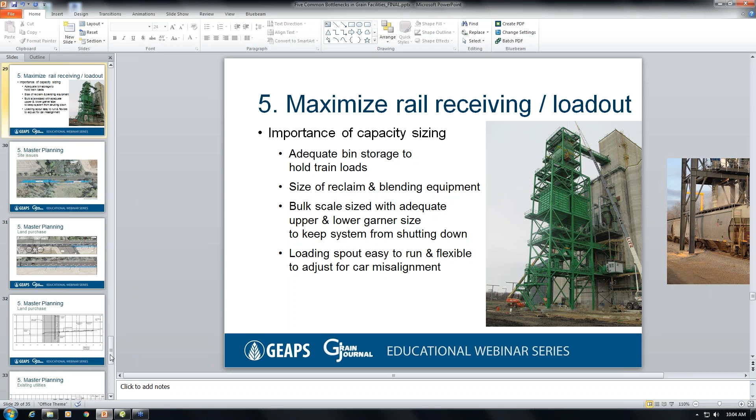Thank you. So in our presentation today, we're going to talk about a number of things. The first one is ways to help keep traffic flowing through your site and minimize backups, ways to get trucks unloaded faster at your facility, talk about how automation can help run the facility with less labor, limit product damage and labor in filling and reclaiming outside storage, and what are some options to make loading trains easier and faster. Pat is going to now talk about alleviating site traffic issues.

All right, thanks, Doug. There's going to be three main subjects that we're going to go over today: staging, routing, and then scale and probe locations. The first one we're going to discuss is the staging area. So staging area being defined as the area between the entrance to the facility and all the way up to the probe location. Typically what we see for these facilities is you get your peak harvest time. You're getting anywhere from 250 to 500 trucks per day, and it requires a lot of stacking space on site.

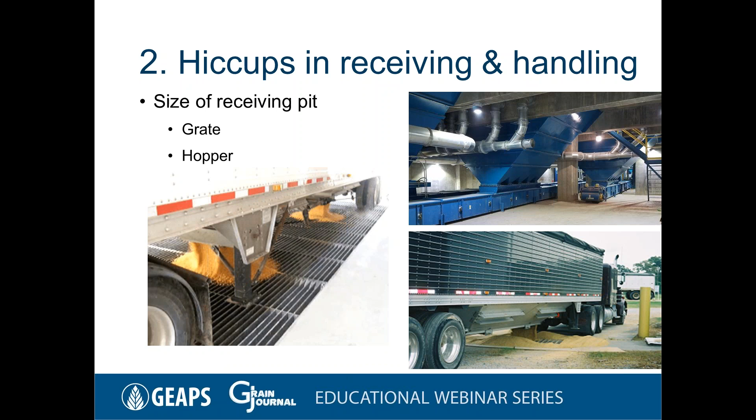Now, when you're looking at exactly how big the grate and the hopper needs to be, it's going to vary somewhat on a case-by-case basis, and it's also going to have to be sized in coordination with the reclaim equipment. However, a good rule of thumb is for the hopper to be able to take one truck of material. So you've got your hopper and your grate there.

The next thing is have an employee there to open the truck hatches at the bottom, right? So a trucker pulls in, has to get out of his cab, walk down, open up the hoppers, stands there. When it's done, close the hoppers, and get in his truck. Well, that time for the trucker getting out and back in is additional time that you're using up in the cycle.

Another issue that we sometimes see is truckers don't always want to open their gates all the way. Sometimes they open them just partially because they're afraid of having the grain back up and flow over the sides of the grate, which gets back to sizing the grate properly. So it eliminates some issues like that. And also, truckers do tend to talk with other truckers and employees. Keeping them in their trucks helps limit that as well, keeps distractions from happening.

So now you've got the actual pit there, sizing the receiving equipment. Now, when you're sizing the equipment, looking at how fast it's unloading, that is one thing that you want to analyze for cost of what you're willing to pay for and things of that nature. The bigger issue to address, though, is bottlenecks. And when I say that, I mean if you have a 25,000 bushel per hour receiving conveyor and a 20,000 bushel an hour leg, you've got a bottleneck there.

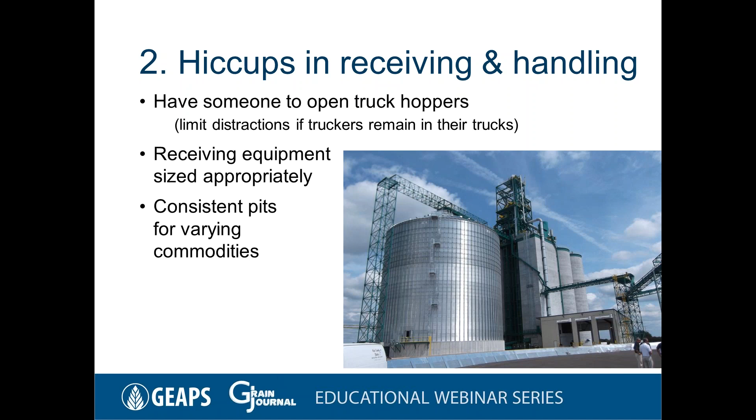So the next item we're going to talk about is automation, specifically finding the balance between labor and automation. Labor is hard to come by, and when you do find it, it's hard to retain it. This is the case with not just the grain industry, but most industries in the country right now. So how can automation help you?

Well, automation can basically do the work that you may have employees do, and you can do this at various levels. So we're going to start out with a partially automated system. This will generally involve installing a PLC or a computer to run your facility. You'll have a central computer in an office. Sometimes you'll have various terminals located around the facility where you can start and stop equipment and run it.

This PLC is typically hooked up to safety devices so that if there's an error, it'll shut down all the appropriate equipment. Not just the machine that had damage or had an error, but any other equipment going to it or from it, to help prevent that from getting damaged as well.

Another thing is a bin inventory system. So not just necessarily high-level indicators, but continuous level indicators. It can help tell you if a bin is full or if a bin is almost full, like there's not really enough room to put a whole truck in there, but it's not quite full. The beauty of these systems is it can really help you out in the paperwork

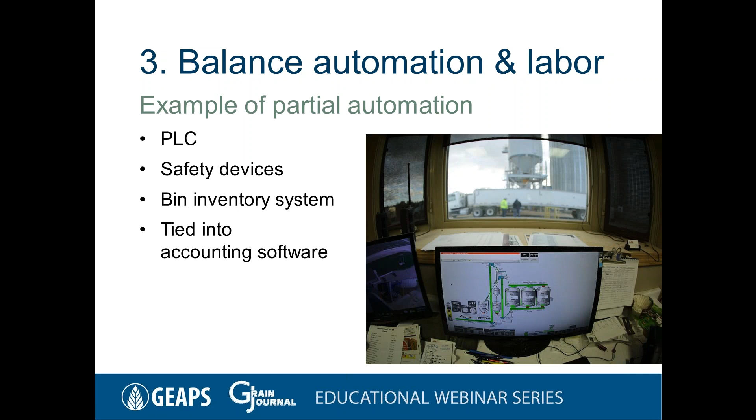of tying it into your accounting software. So if you've got records in there of this truck brought in, this quality of material that you're entering in, it weighed this much, and dumping it, it'll help you keep track of what you're paying your truckers. It'll also help you keep track of your inventory. So when you have enough to ship, if somebody calls up and wants to know, hey, I'm looking for 20,000 bushels of corn, do you have that? It can make a lot of that stuff real easy to access.

So now, this is kind of a simple version of how a PLC system would typically work. So let's say we've got a receiving pit with a truck and we want to send it to the bin on the end there. So what you'll do is you'll click on those two items, truck to bin, and the system will go through and start up the equipment in the appropriate order. So the first thing it'll do is check to make sure the fans aren't running, so when you are dump filling the bin, it's not throwing dust everywhere.

And then it'll start up the equipment, generally from the destination to the origin. Getting all the positions set, starting it up, checking the right gates, starting up the dust containment system associated with that equipment. And once everything is up and running, it'll start up the last piece of equipment, which is the pit, and start getting the material moving forward.

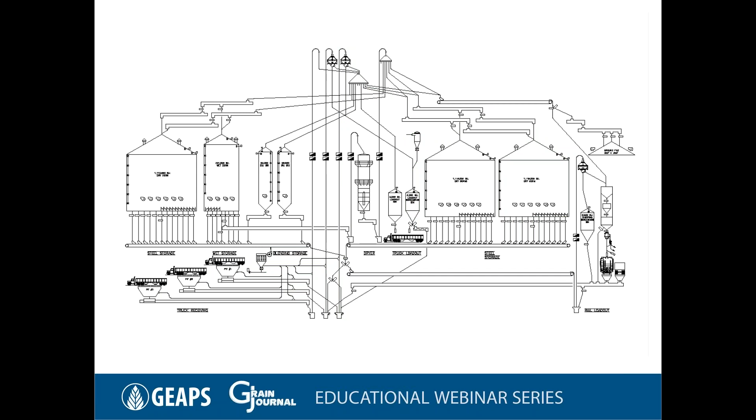This also works in reverse. When the system's done, if you say, all right, the truck's unloaded and hit it, you can have a delay built in there to make sure that the equipment is cleaned out before it shuts down. So it'll shut down the drag once it assumes that's empty, and then following that delay, the associated dust collection equipment, and then the distribution equipment up top until you've got your material in the bin.

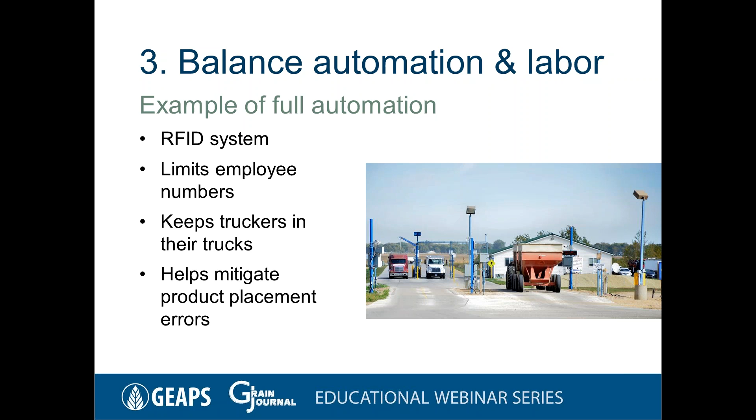So now going a step up from that is a more fully automated system. This typically involves using an RFID system on your facility. An RFID system is where you have a tag in the truck that various sensors read, so wherever the truck is on the site where they have readers, it knows where that truck is. This helps check trucks in and limits the number of employees needed to talk with truck drivers, direct truck drivers, and things like that. Keeps the truckers in their truck, like we talked about before. And as I'll show you in a little bit, it helps mitigate putting the wrong product in the wrong bin.

So we go back to our site here. Trucker comes into the site and pulls up to the probe. There's an RFID reader at the probe. The probe will go and probe the truck. Now, there are actual automated probes starting to be out there that don't require somebody to run them, but most facilities nowadays are still going to be using a probe that somebody's controlling.

But what it does is the RFID reader says, all right, this truck is currently being probed. When the sample comes in, it tags the sample. If you've got automated sampling equipment, it automatically logs the results of that to this truck. Otherwise, whoever's sampling it can plug that information into the computer right there.

So all that information is logged into the computer with the truck. The truck will go ahead, get on the inbound scale. It'll weigh it. That'll get entered into the computer system with the truck. Now, sometimes there'll be a display board here, or if you need to have a little more time for the sampling and grading between the probe and the inbound scale, and before it's ready to move on, you can have another staging area here with another

RFID reader and display. And what this will do is once everything's been graded, it'll tell the trucker which pit to go to. So the trucker will then move forward to whichever pit they've been assigned. And there'll be an RFID reader at the pit. What this does is it tells the system, hey, the truck's at the right pit, or more importantly, it'll tell them, hey, the truck's at the wrong pit, so that you can have several actions, like maybe the equipment will stop, or you'll have some alarms and sirens go off, or notifications go off, hey, you're at the wrong pit. So that'll help you keep from accidentally putting corn in your soybean bin or something like that.

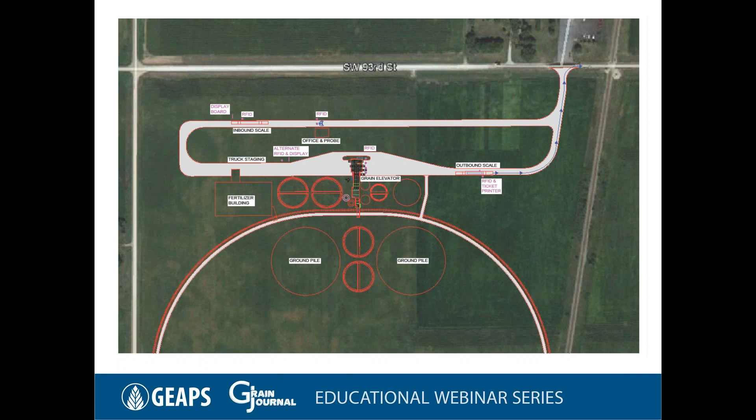So now once the truck's done here, it moves to the outbound scale. We have another RFID reader. It takes the weight of the empty truck. It looks at what the inbound weight is, the grade of the grain that was brought in, how much you guys are paying for that, and it'll print them a receipt with all that information on it right at the printer there. They can grab that, and then they can leave the site. So this really limits how many people you need in order to get the trucks through the facility.

So now moving on, we got our fourth item here, which is effective use of outside storage. When we're talking outside storage, we're talking specifically about ground piles versus bunkers versus buildings. All of these items serve a great bottleneck in harvest time, meaning, hey, you need a quick place to put a whole bunch of grain. You don't necessarily need to store it for long periods of time, but you just need to put a bunch of grain somewhere quick and inexpensively. And all of these work good for that purpose.

Ground piles are labor intensive, and they produce high risk of damaged product. They're typically just kind of dumping it on the ground somewhere at your facility. Sometimes you'll have a prepared pad. Sometimes you just have an open space where you're like, hey, I can put some grain there. You're typically filling it with some portable conveying system that you have to have people moving around, not to mention that system is generally not as fast as your main receiving system at the facility, which is going to slow things down, take more time.

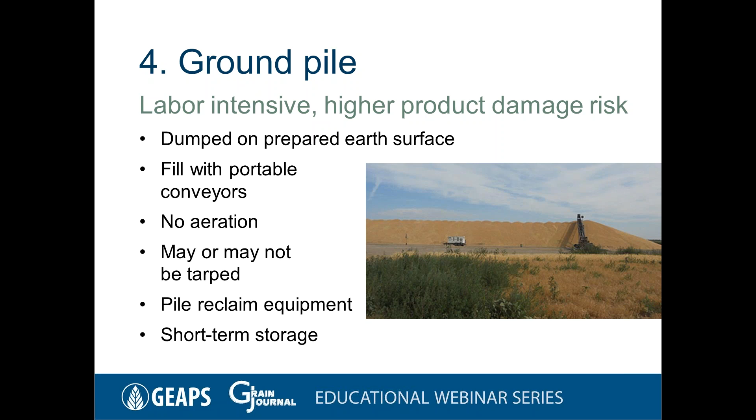You're generally not going to have aeration in this. It may or may not be tarped. If you are tarping it, you have all that time that you need to take and tarp the pile. And then when you're reclaiming it, you'll generally have either a front-end loader or some sort of pile reclaim equipment that's putting the material in a truck and taking that back to the main receiving pit. So even though it's a great inexpensive way to get a bunch of grain down, it's pretty labor intensive to do so.

A step up from this, which cuts down on the amount of labor you'll have, is a bunker system. This is still time consuming to tarp and reclaim, but it's a lot less labor intensive because it's generally tied to the main receiving system at the facility. So the trucks are just going along the regular path at the main receiving pits. Your employees are just out at the main receiving pits doing their stuff. You don't have to have anybody special out there moving the equipment or having a slower system or anything like that.

These are generally on hard surfaces like asphalt, which helps when reclaiming it, as you're going to get less product damage, because when you're getting it back, you're not going to be leaving an extra layer on the bottom, or scooping up gravel trying to skim that bottom layer of the pile off. These a lot of times will have aeration with a center aeration pile or aeration tubes put in. However, if you have the aeration tubes put in the floor, there's labor involved with setting those up.

However, that's generally before harvest starts, so it helps you out a little bit during the rush. And then tarping systems. There's automated tarping systems, which the tarp will raise and cover the pile as it goes, but you still have to get it set up and hook it up around the pile. Otherwise, if you aren't using an automated one, you still have to go and tarp the pile. And as with reclaim, you start to see automated reclaim systems with conveyor systems extending into the pile. And we'll talk about those a little more in a minute here.

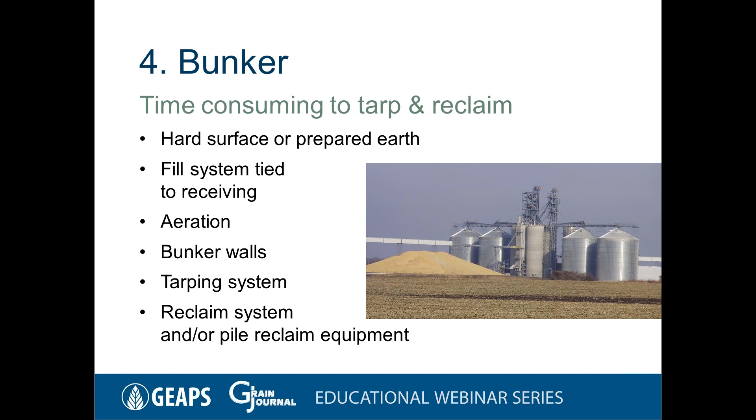Flat storage building. So flat storage building still has the time to reclaim, but you lose the tarping and a lot of those issues associated with it. And it also cuts down on the product degradation when reclaiming it. Typically, these will have concrete floors. They'll be tied into the main facility receiving system. A lot of times, these will have aeration systems already cast into the floor, so you don't have to worry about setting up the tubes or anything like that.

And then with the concrete sidewalls and the roof structure, you've got an enclosed shell that is going to keep the product protected from the elements, and there's not the labor of having to put the tarp on and off and stuff like that. And lastly, with these buildings, you generally see reclaim systems via tunnels in the bottom of these, which will help reclaim a portion of the building before you have to go in there with a front end loader to move the stuff around.

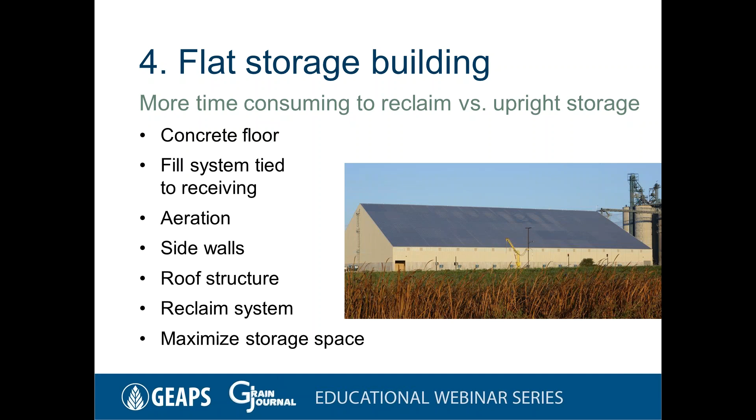So now with all these systems, reclaiming it is generally the most time-consuming, labor-intensive part of the item. So if you put in a reclaim system, being a conveyor that runs underneath the pile, it can help you eliminate having to have trucks driving between the storage area and the main receiving system. Now, this can be done to various extents, whether it be just having a single grate just inside the wall that you can move all the material to, or if you have the conveyor extend to the center tower,

like the picture on the right there, or even extending it all the way through, which is going to allow you to gravity reclaim as much product as possible before you have to go in there and start moving the product around. Now, this can be done with either just a shallow trench that you embed the conveyor in, kind of like the one on the right and the left there, or it can be done with a full-size tunnel in case the conveyor breaks and you are worried about getting down there to fix it or something like that.

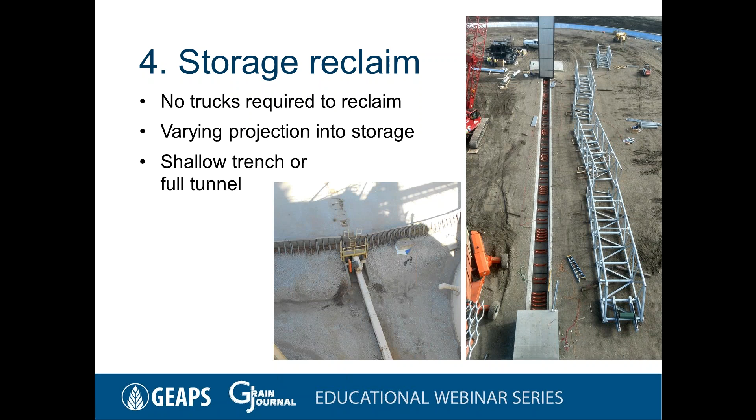Now, if you are reclaiming with a truck and you don't have the automated system in there, there's a few things you can do to help you out as well. So we've got the site here with the ground piles inside the loop track. If you're reclaiming this, you've got a pile reclaimer or a front end loader that you're using to fill trucks. The trucks are looping around, going over to the main receiving pit, dumping the material, coming back, getting filled up, and continuing so.

Now, another thing you can do is put a pit on the back side, basically where your rail reclaim is, or on the inside of the shuttle. This will cut down on the distance that the trucks need to drive and the navigating to get to the pit, and just makes it a little easier. The downside of this is you're not necessarily going to put as big of a pit back here as you do at your receiving building. You can, but it'll probably be a little bit slower because you only got the one pit.

However, if you happen to have a shuttle train there that you're loading, or parked on your tracks waiting for the BN or whoever to come and pick it up, it allows you to keep reclaiming that ground pile while you're loading the train or while the train is blocking access to your facility, which means it's not shutting down a process that you could be doing. And in fact, there's a number of facilities that when they're loading trains, they'll be reclaiming the ground pile and sending it straight to the train.

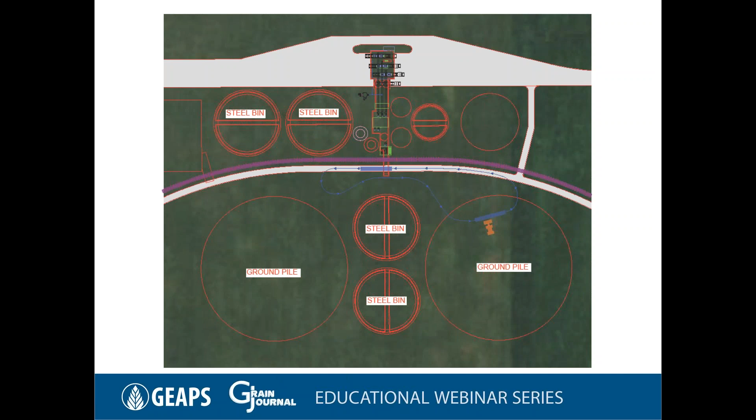All right, so I'm going to pass it back to Pat now, who's going to talk about making rail work for you. All right, thanks, Doug.

All right. So we're going to look at a couple different types of facilities. The first one we're going to look at is going to be a loop track, and then the second one is going to be a track siding. Two different types of layouts with the end goal of getting a 24-hour turnaround to meet the mainline requirements for getting a unit train in and out of that facility.

So the bottleneck here is going to be speed and efficiency of the rail. They like that 120 car string so they can come in, pick up a single product, and move out. It doesn't congest their main line. So they have incentives for owners, reduced rates to move that product at a quick rate.

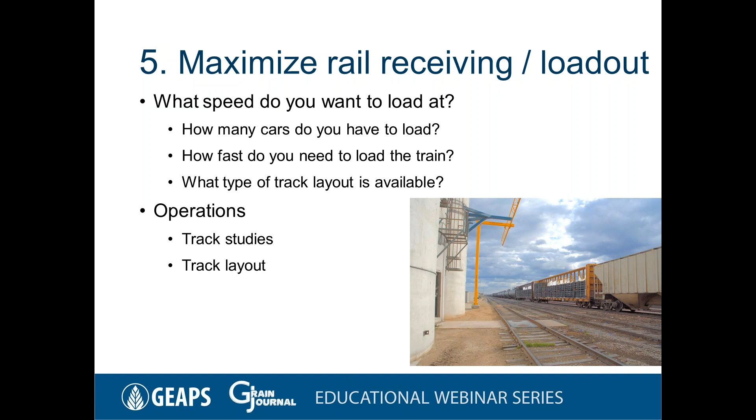So the first site being a loop track, going back to the facility that we've been looking at today, takes a large piece of land. It's about 140 to 160 acres, about a quarter section of land. Not all pieces of land and rail run in perfect rectangular location, so it really is kind of site specific. But what you need, when selecting a piece of land, is make sure you got about 2,000 feet in width at a minimum there. That allows for the proper curves on site and for enough grading and ditching to not have to impede on existing right-of-ways of roads and rail.

So a real bottleneck with some of these facilities when planning them out is, did we purchase enough land? It's much harder to go back after you've worked out agreements with a property owner and say, hey, we need to get another 5 acres here. It's amazing how that additional 5 acres increases in value fast. So planning ahead, thinking about this, getting this approved through the main line can save a lot of money and time, and also help with efficiency on site.

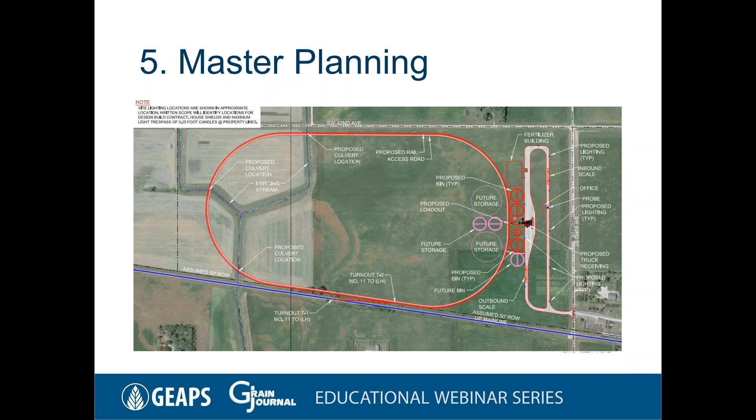It's going to take longer for a ladder track to move than a unit train because of the downtime you have with shuffling cars. Each ladder track has a string of cars that it can move. In this particular case, this is about 10 cars here. With 120 cars, that's 12 different strings of cars you need. And if each time your downtime is 10 minutes to go grab another set, that's 2 hours of time.

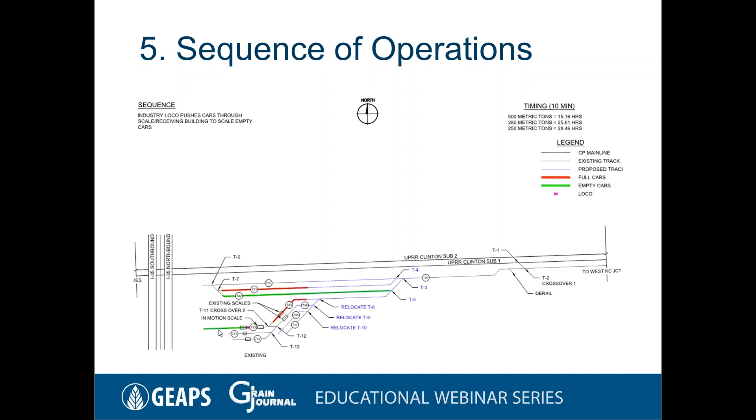And finally, this last slide is showing how, in this particular case, the main line would come in and pick up 2 strings of 60 cars and depart off to the east. So this gets approved through the main line. They understand how it works, and it's really a cartoon, but it takes something that's complicated and simplifies it very quickly.

So that really helps get the approval process going, which can probably be the biggest issue with track projects: getting the main line to approve how this facility is going to operate, getting everyone to agree. There's a lot of entities within the main lines that have to approve these projects. It's not just the geometry of the site, but there's business units, scheduling of other rail in the area, and such.

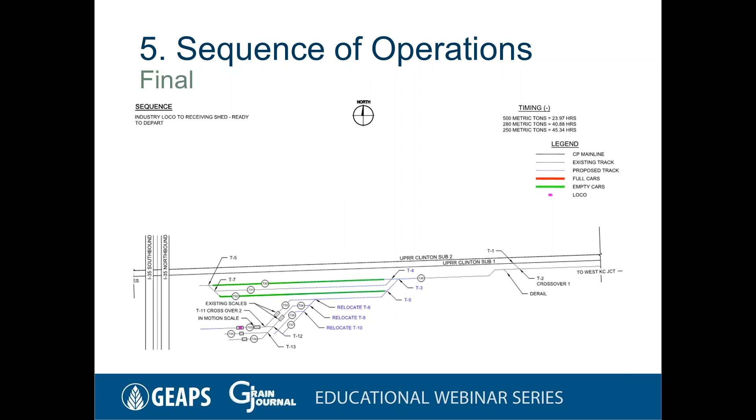I'll pass it over to Doug now to talk about rail receiving and loadout. Yeah, so with your systems here, it's important to look at a number of things, specifically for loading out trains, receiving as well. The first thing you want to look at is adequate bin storage for filling the trains. So is your facility large enough, and the bins you're going to be pulling off of, such that you can get all of the material into that train out of the bin by gravitating it?

Or are you going to have to activate some sort of sweep or a floor aeration system or a canal system to empty the bin out while you're doing it? You have to take that into consideration when sizing your equipment and the time you need to get the train out. So ideally, you want to have a plan where you're gravitating all the material you need to get a train out without relying on one of the slower systems, or a plan where, as you're activating a bin sweeper on the first bin, you're emptying from a second bin at a slower rate.

Same with the receiving system, looking at the various components you have and making sure that they're all sized to work appropriately with each other at the rate that you need, having the conveyors and legs and all of that match up with the same speed. Now, what that speed is going to be depends on a number of things, and this kind of gets down to sizing the bulk scale.

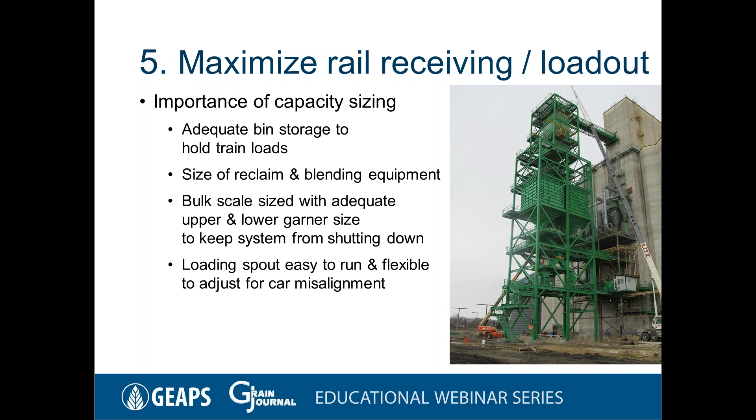The last thing is you want to have a loading spout that's easy to operate. You don't want to have some complex thing where they've got two joysticks and they're driving around and they need to thread the needle. But you want to have it so it is somewhat flexible in case there is a little bit of a misalignment on a car or something like that, so you can adjust it to make up for those issues.

Right. So now, one last thing we're going to talk about here is master planning, and this is more along the lines of getting a project started and eliminating the time that you're going to have at the beginning of a project to get it to completion. And Pat's going to talk about that. All right, thanks, Doug. So some typical site issues that you run into.

Most of the things that we've looked at today, we've done a lot of planning with aerial photos, laying out track, and then you come along to things like wetlands. These can be observed. You can look online. We'll have some mapping for that, just some site observation. What it really takes is a professional delineator to come out and verify these areas. The key component to this, though, the bottleneck is you'll have this facility, and it might take 12 to 18 months to build. And if you don't plan for investigating wetlands at the beginning of this project, this could end up being the last thing that prevents you from getting product to your site.

So the best thing to do is go out, label the areas you think have wetlands, and get it delineated. And that wetland delineator will let you know, hey, this is going to be a 3 to 6 month process through the Corps of Engineers. Or if it's a higher value wetland, it might be 6 to 9 months. But that's very critical in getting that approved and getting all that in place, because you can't move any dirt in that area until that's approved.

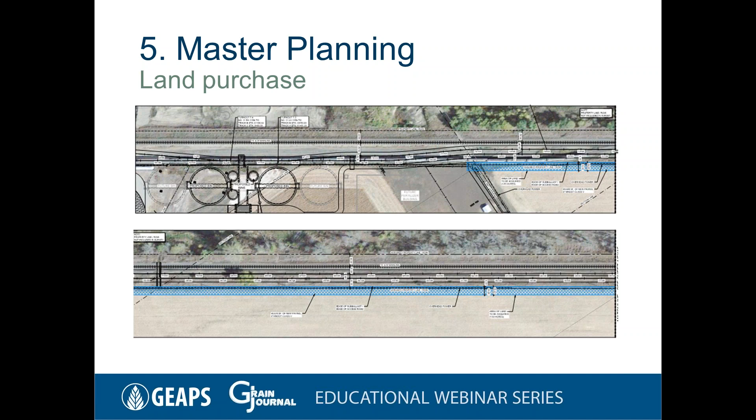Typically, railroad right-of-way is 50 feet, sometimes it's 100, and to go beyond that, you usually need at least 25 feet of land on a ladder track. So if you're doing that over, say, 12,000 feet, that's going to come out to about 6 or 7 acres of land. And not everyone is willing to sell. So these are discussions you need to have ahead of time and work with your designer on that.

So planning ahead, assuming you're going to need that, it's a lot more land than most people think. Buying a little extra is definitely invaluable. It'll save money from retaining walls and such.

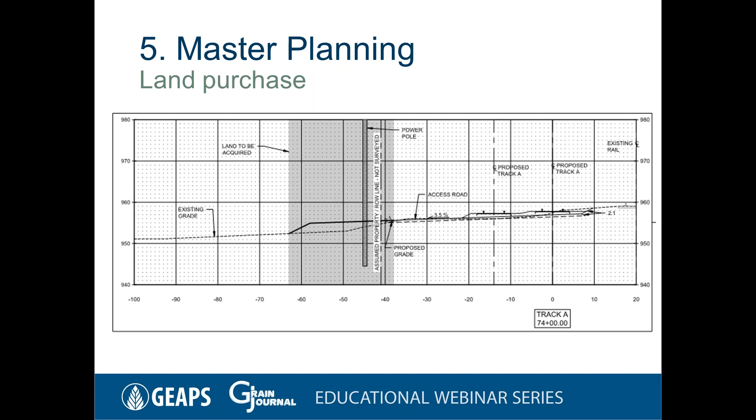The last item that comes up is the unknown, which is underground. Underground utilities, gas, electric, phone, fiber optic, water main, sanitary sewer. Those things are beneath the rail, and they usually have easements with them. Not all of them are labeled. But having conversations with the main line, with local utility companies, and letting them know what your plans are can really help alleviate delays during construction.

Relocating a gas line is something that takes months, if not up to a year, to get approved through these facilities. So have those conversations up front. It'll alleviate a lot of stress during the construction period and unknown costs, getting those identified early on. So with that, that was our presentation.